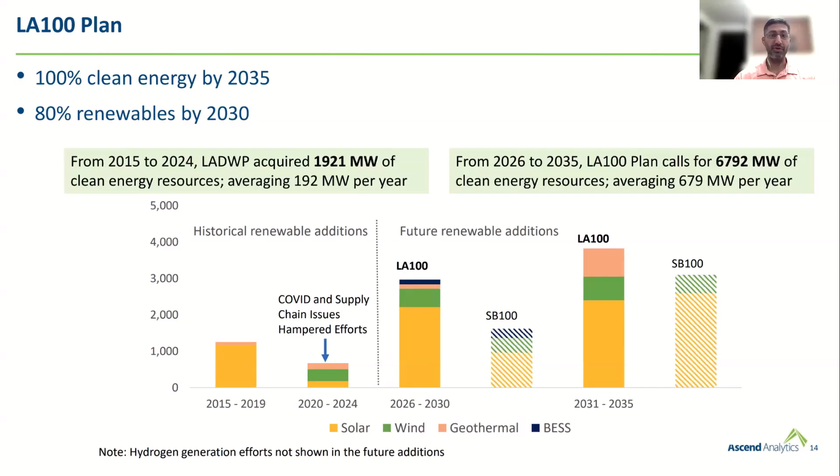Let's go to the next slide, please. Here's a little bit more color on what it would take to achieve the goal. I like the graph at the right because it has the color codes for all the different technologies. And you still do have some gas in here.

So Apex, the striped pattern, that's a gas plant. I think the gray is in-basin gas. You do see the gas fired generation falling off around 2034, including the IPP gas, that's the Intermountain Power Plant in Utah.

Whereas the technology with probably the highest growth is solar. I think the orange is the solar, but I can't see the bottom of the legend. So it calls for dramatic growth in solar and wind, with fossil fuel falling off.

In 2036, wind and geothermal will account for nearly one third of total generation. And the bullet in the middle: in 2035, generation exceeds retail sales by 49%.

There's a few reasons why that happens. It doesn't really sound logical, why would you generate 49% more than what you actually need? That's because of transmission losses.

Also, as we go forward, we're going to have a lot more battery storage, because you're going to have too much solar generation during the day that has to be shifted to the evening through lithium batteries or battery storage. And when you do that, you lose some energy. So if you put 1 megawatt hour into a battery, you don't take 1 megawatt hour out. Because of these losses, as you have more batteries, you're going to have to generate a lot more than what you actually need to use.

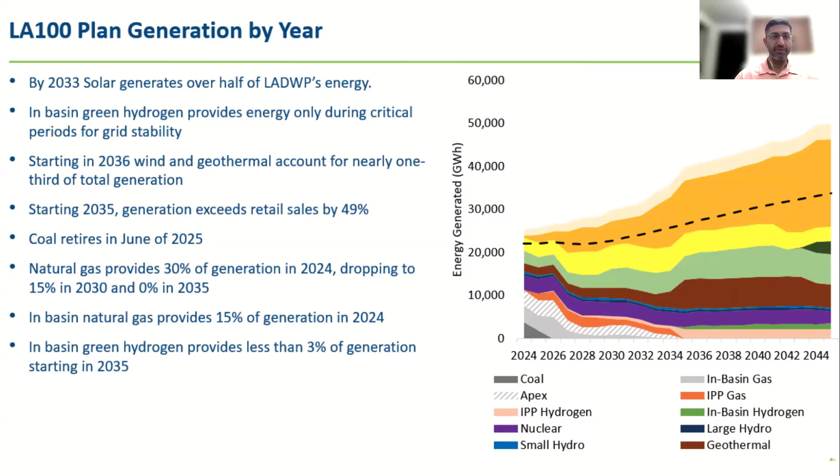These graphs also exist for the Cal ISO, which is the grid that the majority of the state, or about 75%, is on. We're not on the Cal ISO grid because LADWP has its own grid. But Cal ISO shows its own graphs of real time, how much solar is contributing to the peak, and the growth in renewables adoption statewide, or in the CAISO footprint.

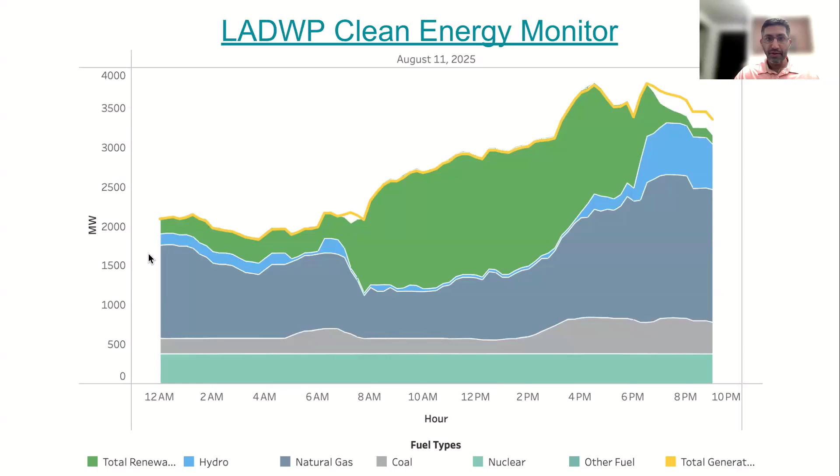So let me go to the next slide.

Eland is the largest solar project that DWP has onboarded to date. I think they just commissioned the second phase of it. The solar is about 400 megawatts total, both phases combined.

So the biggest project DWP has onboarded. I worked on a project called Beacon, which was onboarded about 9 years ago at 250 megawatts. Then there was Springbok, which if you count all the phases, might have been over 600 megawatts. But this one is still a huge victory in terms of scaling up solar with battery storage.

Some of those older projects didn't have batteries. The batteries are really critical because they allow shifting energy from 2 p.m. into the early evening hours. What we're seeing across the state and the country is that when you increase adoption of solar, like these massive utility scale solar projects, you get overgeneration—too much generation at 2 to 4 p.m. and not enough in the early evening hours. It's critical to have battery storage, even if it's just 4 hours, to get you over that evening hump.

This is also known as the duck curve. There's a lot of research and commercial effort to increase the duration of batteries to get to 6, 8, or 10 hours. Right now that's mainly done by just stacking up more lithium, but there are up-and-coming technologies to get to 6, 8, 10 hours of storage to cover overnight hours, which will be increasingly important if we want to move towards a 100% clean energy future.

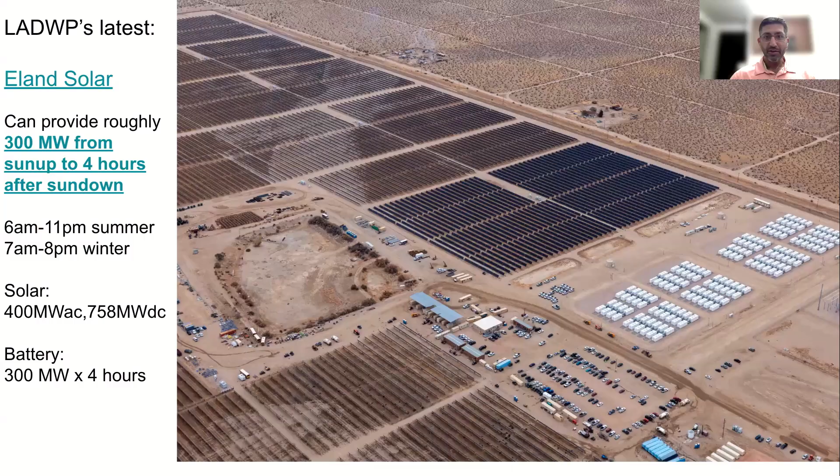Okay, do you want to take over from this point on the in-basin dispatchable?

Sure. One of the things that has generated some conflict between environmentalists and DWP is that people, including me, originally wanted to just stop doing gas power plants, period, inside the city limits. Unfortunately, geography makes that hard because there are a limited number of pathways to get power in from out of the city. When any of those pathways go down, we need the generators inside the city to pick up the slack so people's lights don't go out and their fridges don't thaw. In the 2024 heat storm, local power plants provided more than half of our power, so that was really important.

When there are big, long, rainy, cloudy periods that cover a large area and significantly reduce our solar generation, we need them too—you'll see a graph of when that happens. And finally, regardless of heat waves, when there are wildfires that can cut our supply—and wildfires are just increasing like crazy—we really need protection from them.

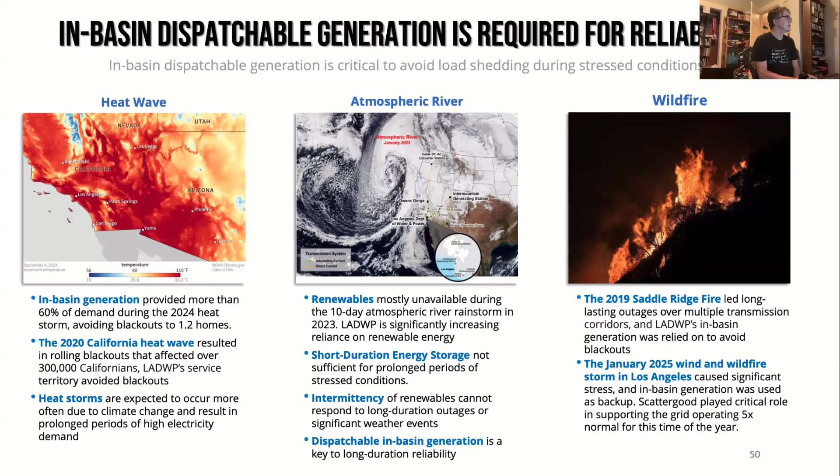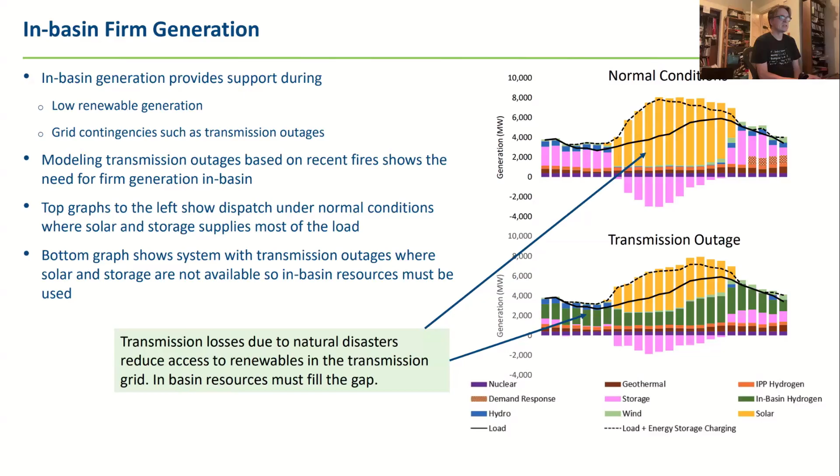But here's an aside, kind of a fun thought—it isn't anything definite. I was at an AQMD meeting where conservatives shot down a proposal to encourage heat pump water heaters. One of the things they were upset about was the unreliability of the grid. That was a serious reason they shot down the idea of electric water heaters, which is kind of funny since half the country uses electric water heaters.

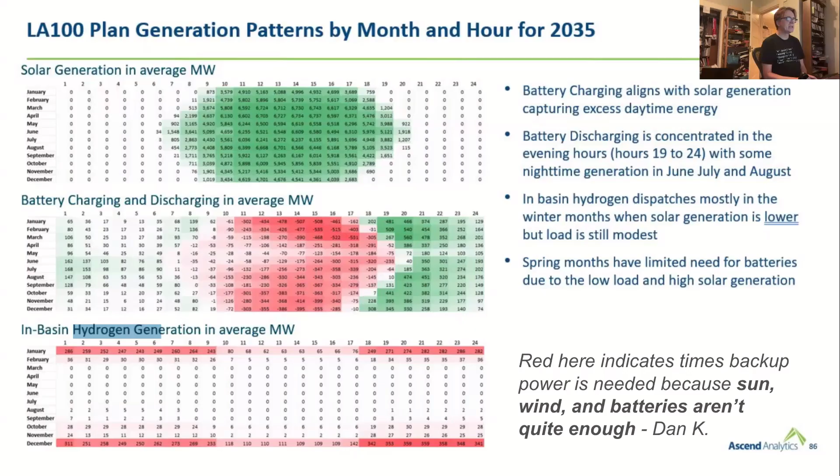And we're the advocates for 100% renewable energy. You should hear the people who don't like it.

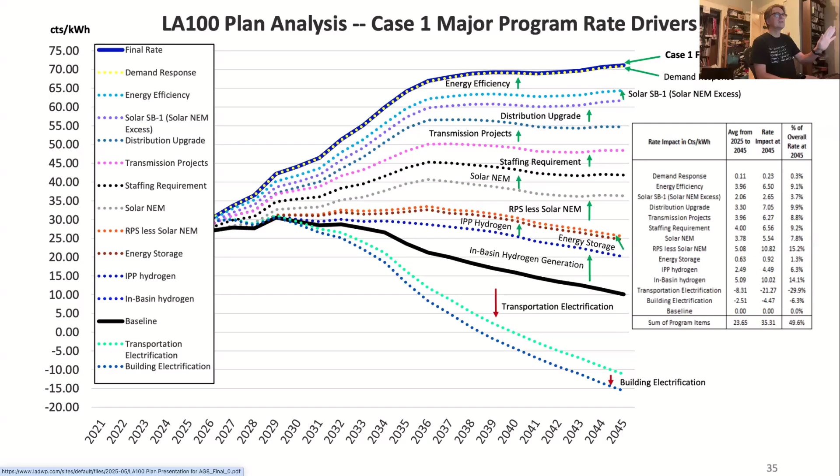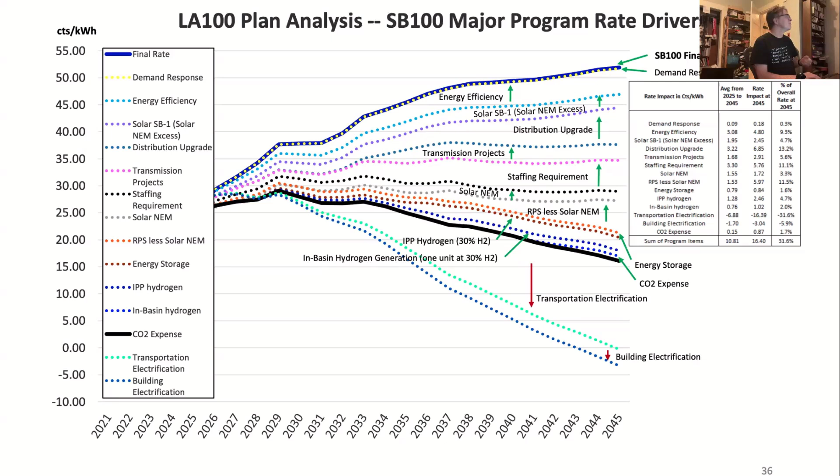So that's LA100. Now let's look at the SB100 less ambitious plan and what drives its costs. Same thing, same benefits from electrification. There's a little bit of cost for hydrogen there, but not too much. Okay, so you now have a feel for what the most expensive parts are.

Okay, but here we get to something that's definitely total energy bill. It's called energy burden. And it shows that there's a fairly small difference, but a significant one, an extra percent of energy burden. It's 5% with SB100 and 6% with LA100, well, no, it's 6% and 7% in 2037. And 6% is the danger line in theory when people talk about energy burden. But this is average over the whole city.

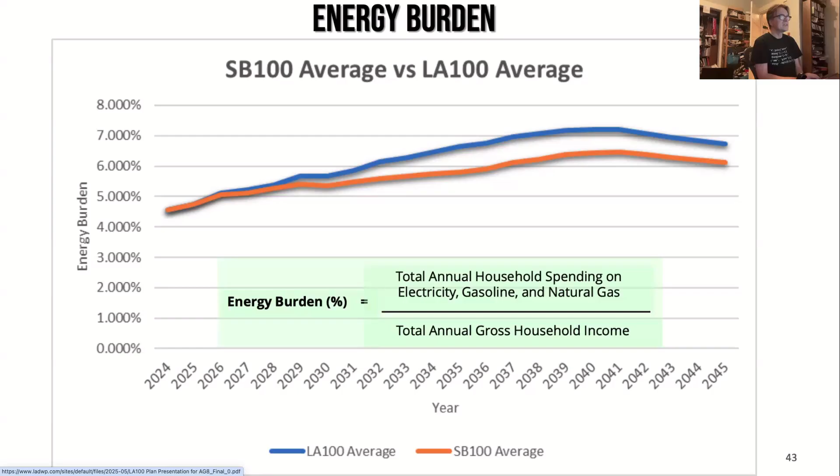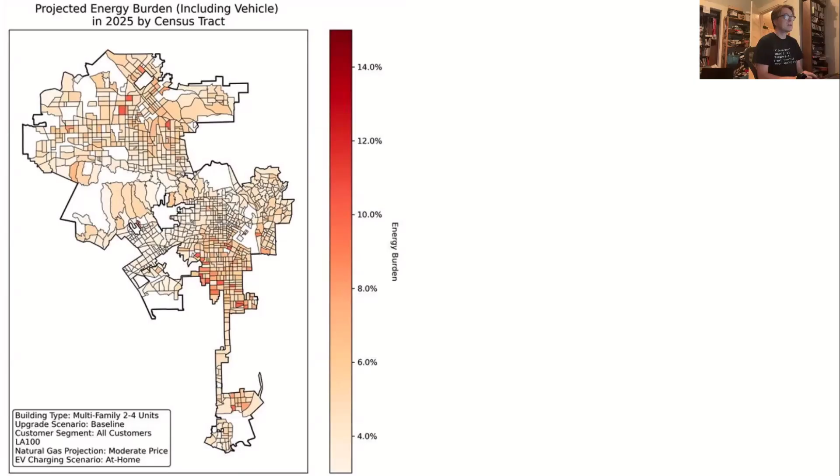So let's look, shall we, at what neighborhoods have the energy burden. This is a really cool graph. It's broken down by census tract, and you can see that some neighborhoods have a pretty high energy burden currently, and a lot of them have a pretty low energy burden. And if we turn on our crystal ball, here's the prediction for which neighborhoods are going to have what energy burden in 10 years under the two plans. And you can see that there are areas of concern.

So this map is going to be a wonderful tool, I think, for targeting energy efficiency upgrades. So if you take all those red neighborhoods and cut their energy consumption in half, they're much better off, right? So I predict that this is going to be a big tool in how DWP targets its energy upgrades.

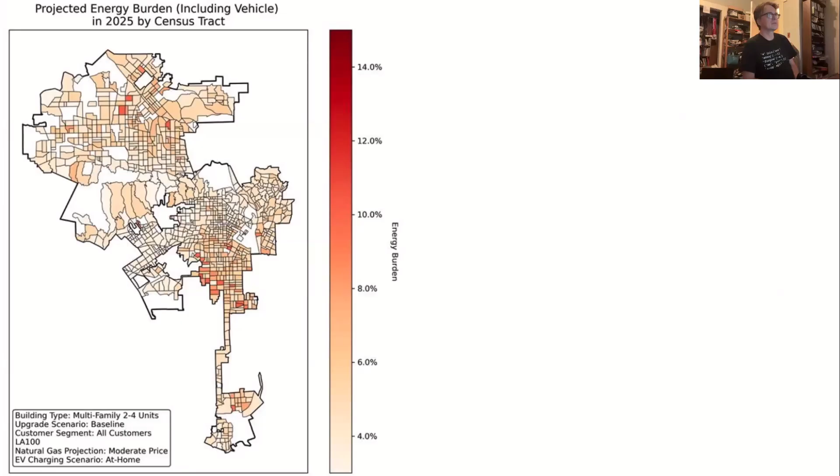Okay, so that's... Hey, Dan. Yeah. Just a quick question. Do they provide current day graphs like this? Or is that what you showed before? Yeah, so that's the current day. Right, so you do see it's the same areas that have the higher energy burden, it's just that they get magnified as we go forward. Okay. Yeah, it's not really surprising, but there are a couple that are dark red in LA100, so those would need attention. So I'm just really jazzed that they have this data.

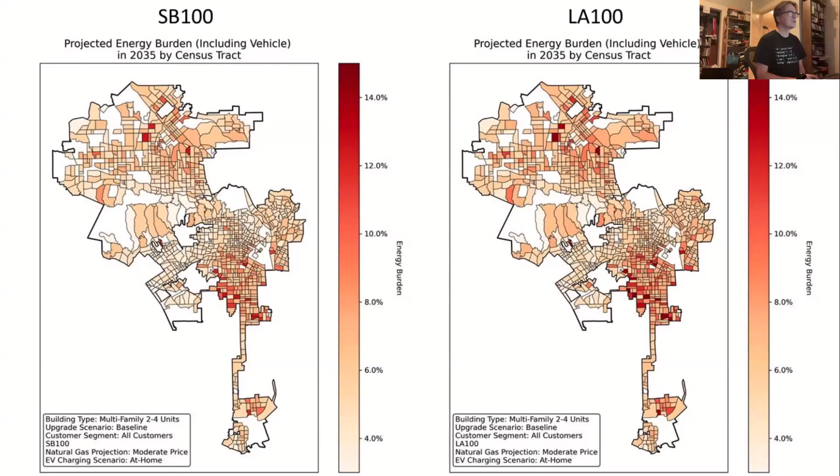Okay, so that's the main part of the presentation. We've covered sort of where we came from, what the goal is, the main tool they're going to use to get there, and the costs. And now I want to give a little more context.

We have a smog problem in the city, which is sort of related. And according to the AQMD, the only way for us to deal with our smog problem is through extensive use of zero emission technologies across all stationary and mobile sources. So DWP is doing its part with LA100, but by gum, buildings and trucks and all those things need to be electrified too if we want to handle smog. So that's really important to keep in mind.

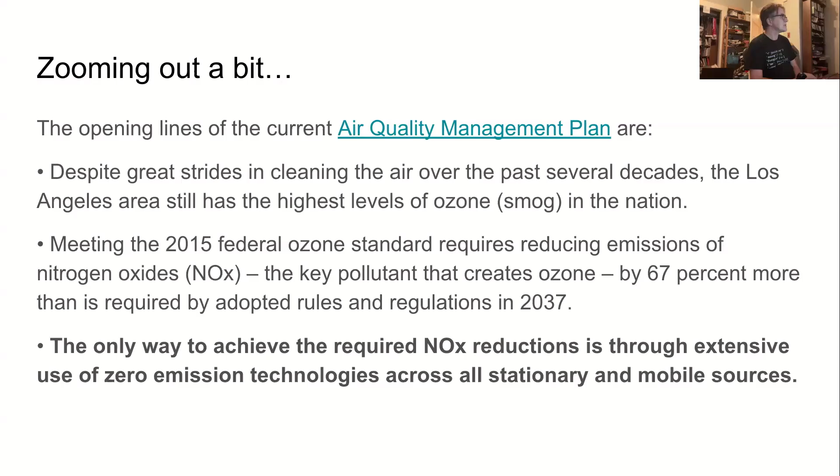And another thing that's near and dear to our hearts is Aliso Canyon. According to the CPUC, we can't shut down Aliso Canyon until we reduce natural gas demand. And the way to do that, they said, is through building electrification and energy efficiency. So a lot of the stuff that's in the LA100 plan will sort of contribute to shutting down Aliso Canyon, but it's not clear if it will do it very quickly.

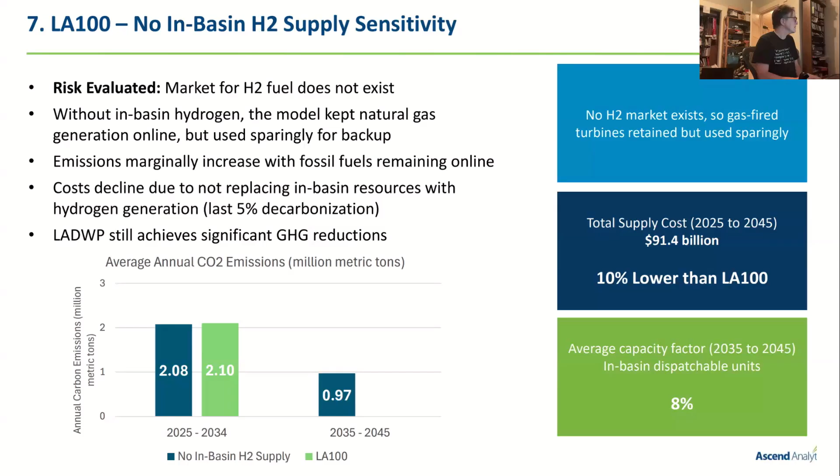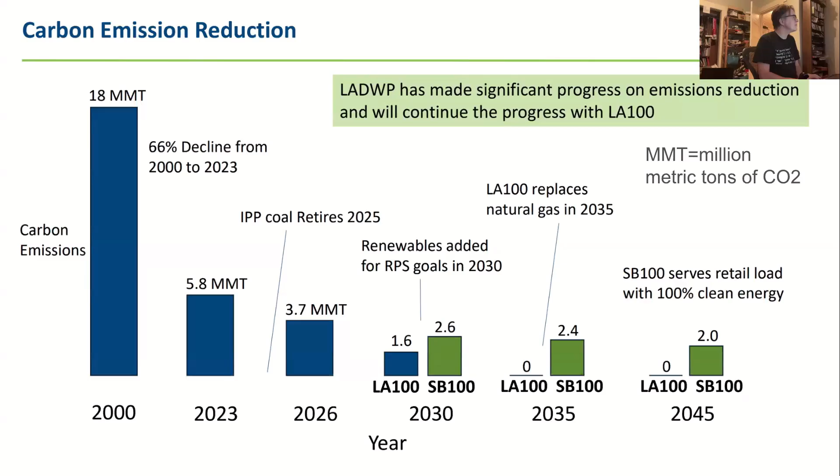Moving on, here's a little bit more data. They actually studied the what-if-there-was-no-local-hydrogen scenario. And they said, well, it would cost 10% less, so $9 billion less. And you'd still have 1 million metric tons a year of emissions. So what was the original figure? We were at 18, so that would be like a 95% decrease over whenever the reference was, 2000. Okay.

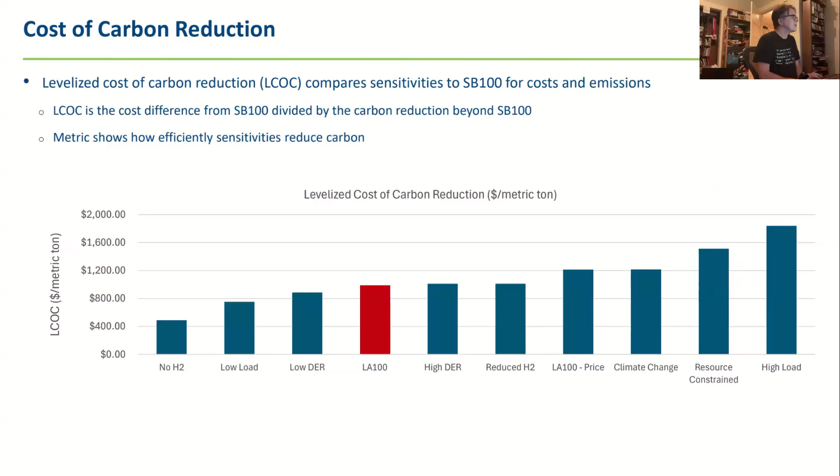So now comes another what if. When you look at conservative comments about the LA100 plan, including those made in the advisory group, they're really worried about the cost of that last 5%. And so it's like, well, this reminds me that a lot of environmentalists are upset about using hydrogen for that last 5% because it would use lots of water in the LA basin, and we're short on pure water.

And so we could kill two birds with one stone, save $10 billion, and maybe make up the difference by spending that $10 billion on electrification of buildings, and thereby improve air quality more and hasten the closure of Aliso Canyon. It's a really interesting scenario, which for budgetary reasons may actually have some traction. When I talked with somebody from the Green Building Council, he was extremely intrigued by this. I think he thought I was reading his mind or something. So anyway, this is an idea.

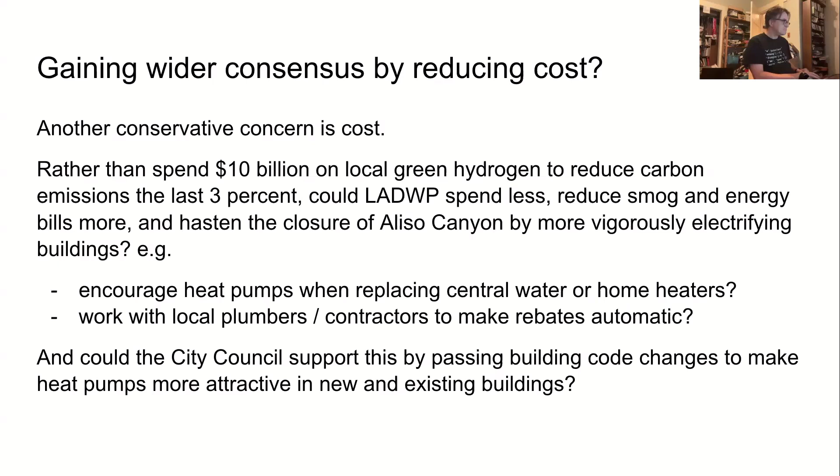The city council could help by passing building code changes to more strongly encourage building electrification. And DWP could sort of beef up what it's already planning to do on encouraging heat pumps and other electrification things. So ponder that. See how you feel about that. And that's it for my part of the presentation.